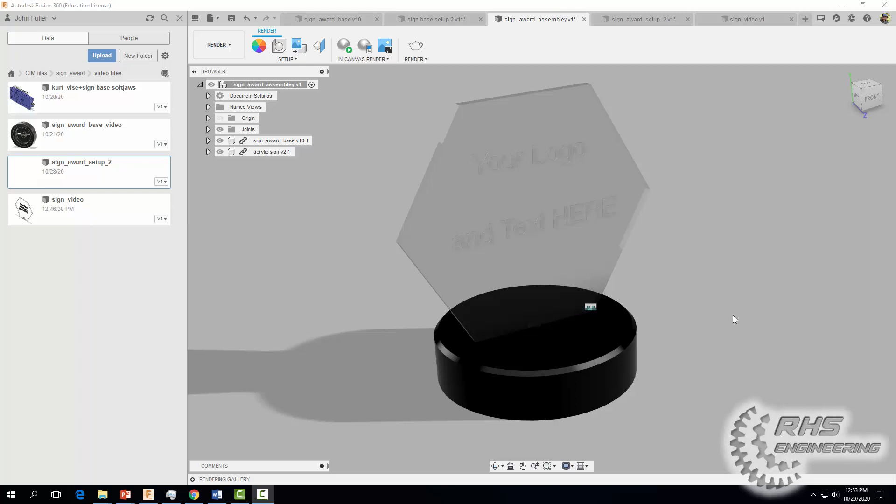Today we're going to learn how to assemble our sign that we made in a previous video to our sign or award base here using a rigid constraint. Then when we're done, we're going to create an exploded view from it. All right, so let's go ahead and get started. Come on up and start a new design.

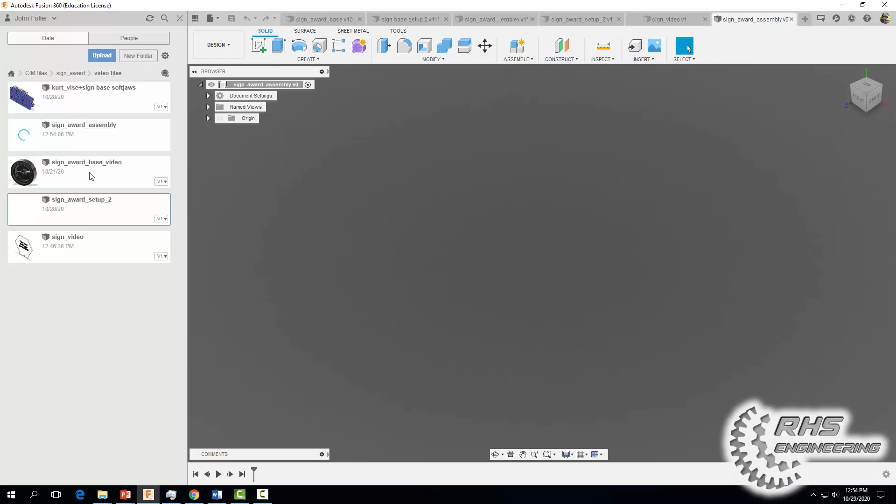Before you do an assembly, it's important that you save it. So we're just going to call it sign award assembly. Okay, and hit save. And now I'm going to go ahead and insert the base here that we made in a previous video, and we're going to insert it into current design.

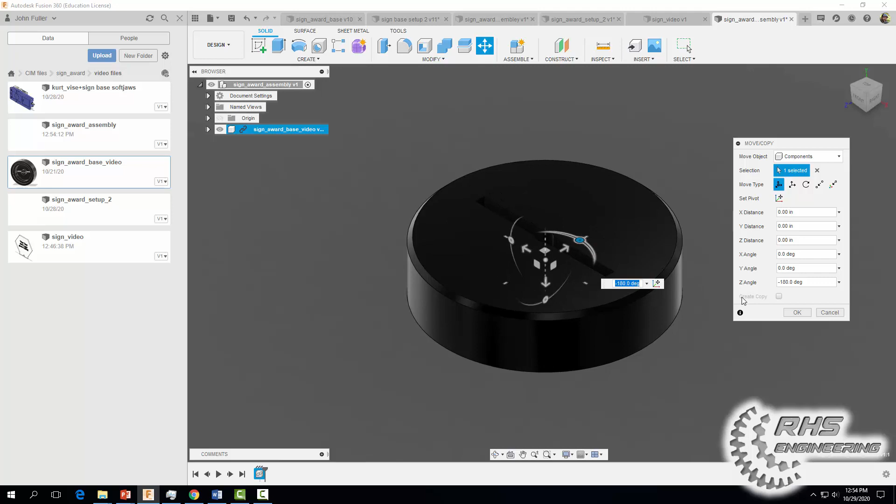We're going to right click and select insert into current design, and I'm going to orientate it or move this guy around to a position that I like. So I'm going to kind of select right there, rotate it around and do something like that. Okay, that looks pretty good. I'm going to select OK. And now I'm going to right click ground, because we don't want it to move. It basically locks it into place.

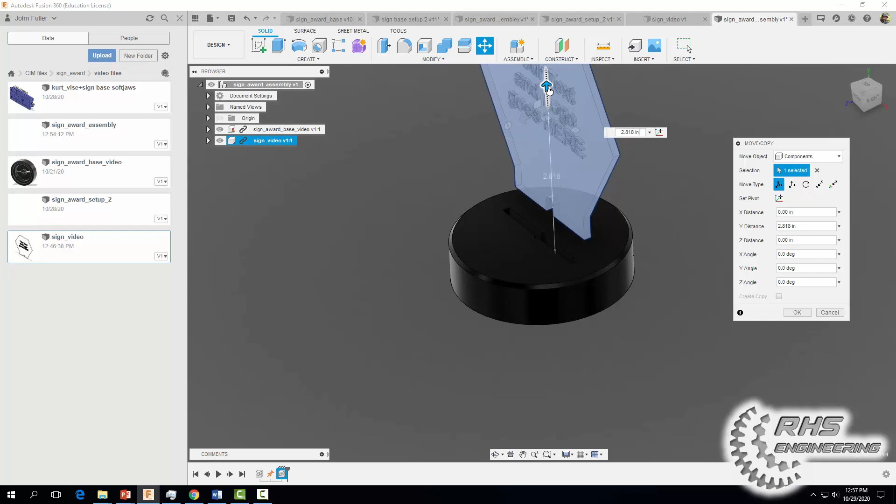All right, now I'm going to bring in my sign. So I'm going to right click, insert into current design, and I'm going to place it in a favorable manner here. I like to place it in a manner where it's going to look like it falls right into place to where we want it. So I'm going to place it right above the slot.

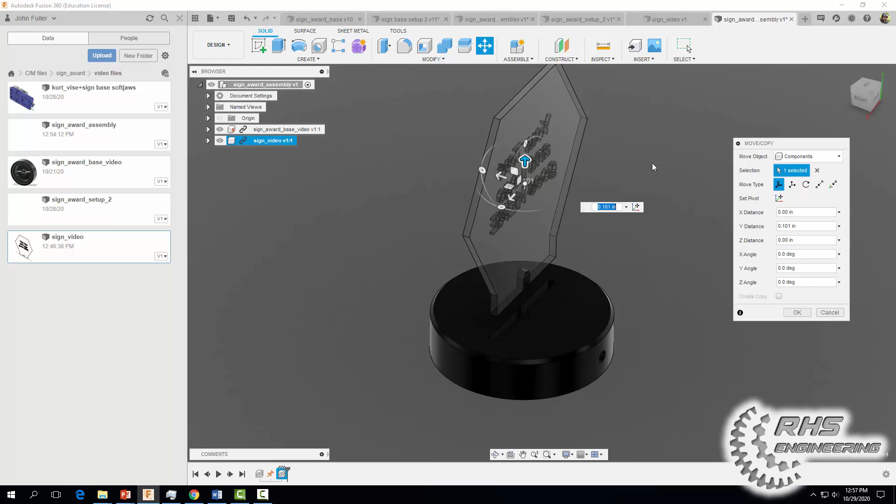One thing you want to make sure if you're in my class and you are making this: make sure that the front of your sign, the part that we're going to engrave on, is not facing this hole in the back here. Remember, we're going to drill that out and put a wire through there. You want the front of your sign to be on the opposite side of this hole. So this position looks pretty good and my sign is facing the opposite direction. So I'm going to select OK.

Now we're going to assemble our sign to our sign base, and we're going to use what's called a rigid constraint. A rigid constraint basically restricts all movement, so there's no movement in the X, Y, or Z direction. It's basically locked into place. So let's do that. Come on up to assemble, select joint, and a rigid joint will not allow any movement. So we're going to select rigid, make sure it says that.

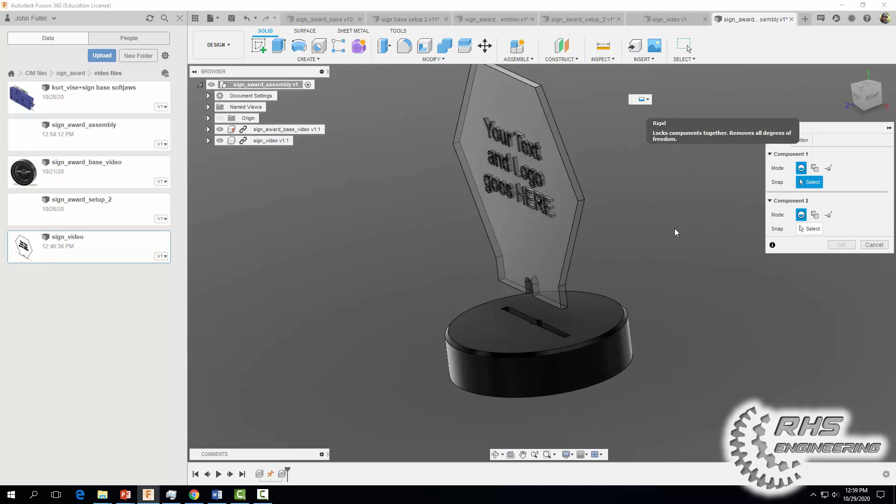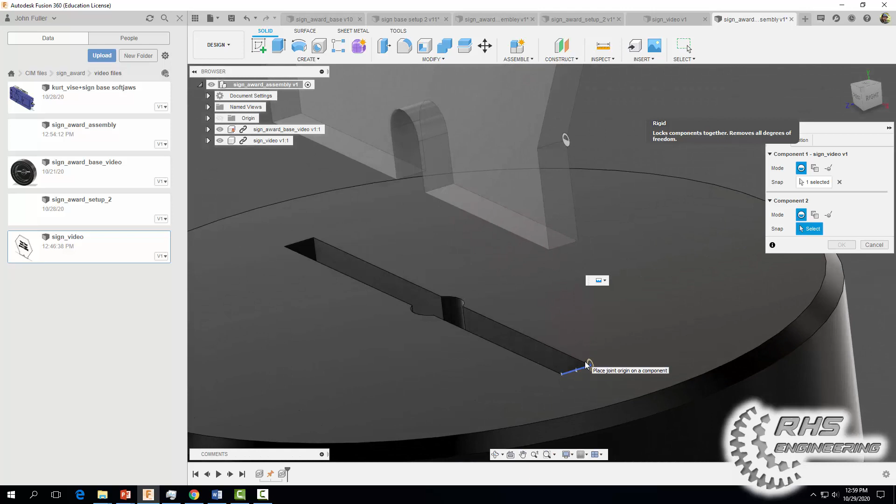And then you've got to think, when you're doing assemblies in Fusion 360, when we put these two parts together, what are the mating parts? In other words, which faces or points are going to match up with other points? So I'm going to click that point right there, and I think it will match up with that point. Let me zoom in and move my mouse right there. And sure enough, there we go. I'm going to hit OK. You can see our rigid constraint has been applied.

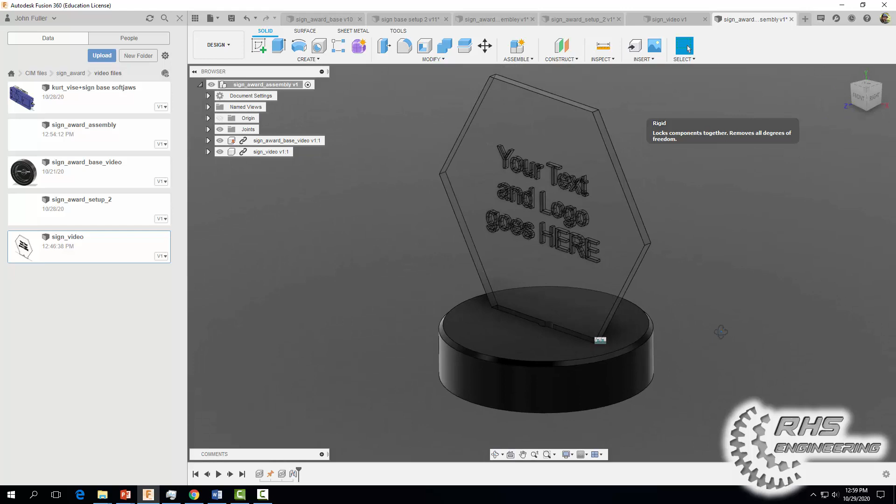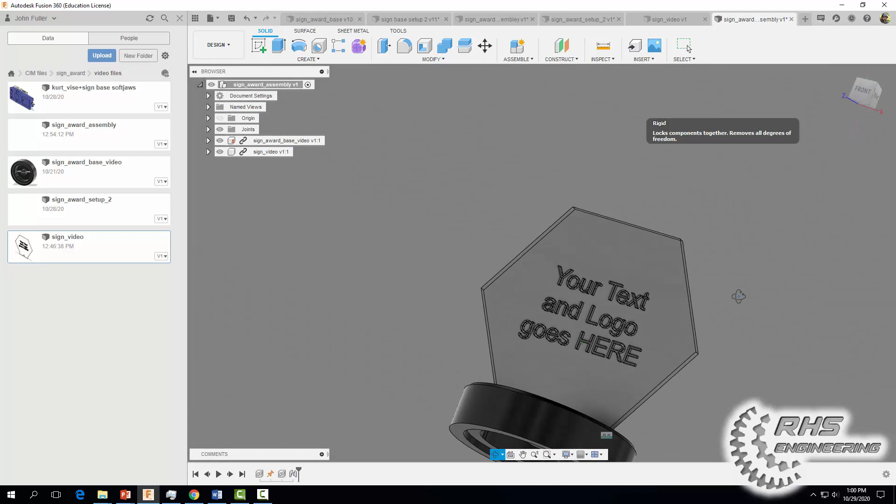When we're done manufacturing this in my class, we will flip this guy over and run our wires in here. We'll put our LED light right here along this boring hole, and our USB cable will come through this hole. So now that we have it assembled, we've got to do one more thing: make an exploded view out of it. So let's go ahead now and save this again.

But before we can create an exploded view, we have to create an animation. So we're going to come on up here to design and we're going to select animation. Okay. And we're just going to pull this guy apart here, so get it in a position I like.

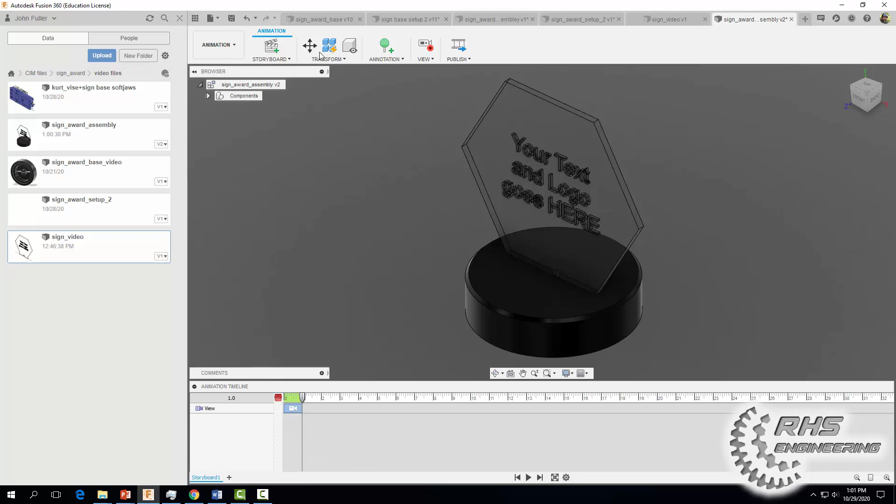And then I'm going to come up here to transform. Okay. I'm going to click on this part and I'm just going to move it up. Something like that. Okay. And that looks pretty good. Hit OK. And I'm going to right click here, show hide trail lines, because I like to see the line that kind of shows it going into place.

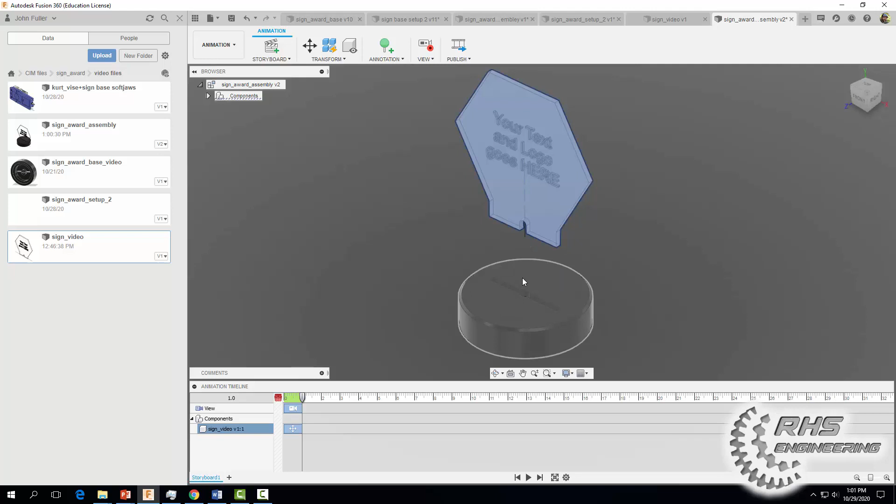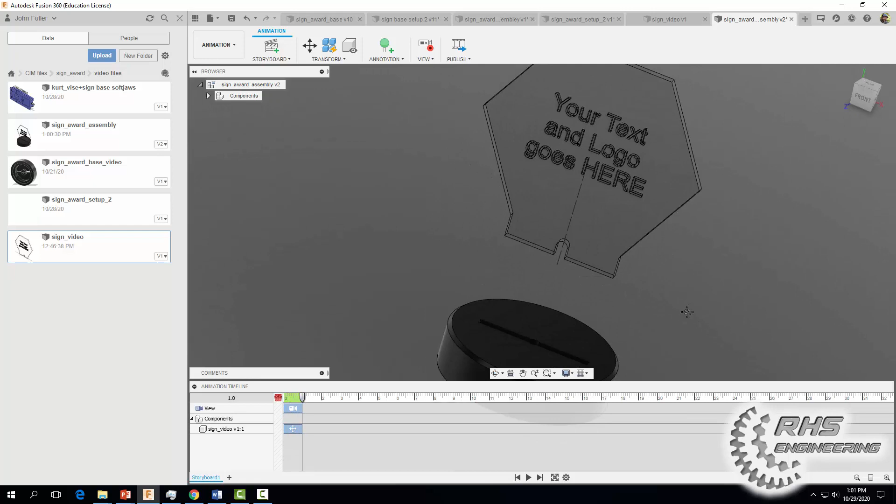All right, and then we can actually animate it. Let's go ahead and hit play. Okay, and I don't like the zoom feature, so I like to delete it, and then I can just sort of see it play here. And there you go. Okay, there is our exploded view. So it basically shows how parts come together or are assembled.

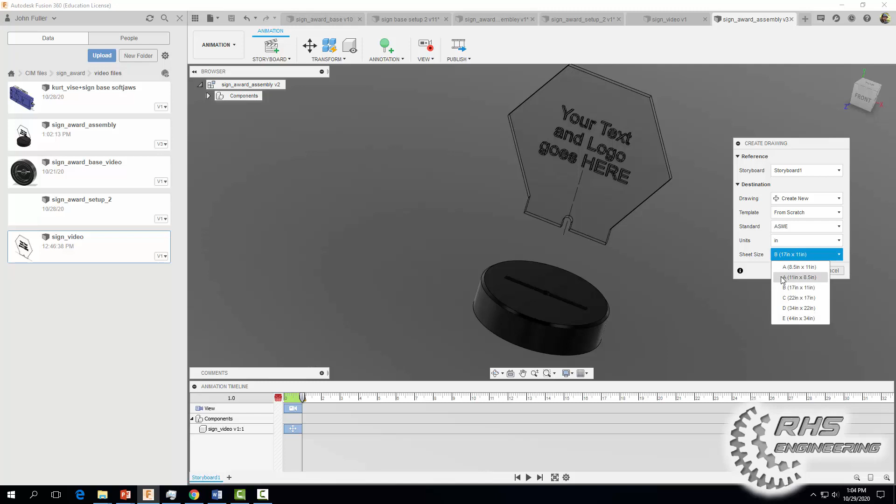Okay, now that that's done, we can create our exploded view. So come on up to animation here, and we're going to do a drawing not from design, but from an animation. And we're going to select sheet size A and landscape proportion. So we want 11 inches by 8.5 inches. Okay, select that guy and hit OK.

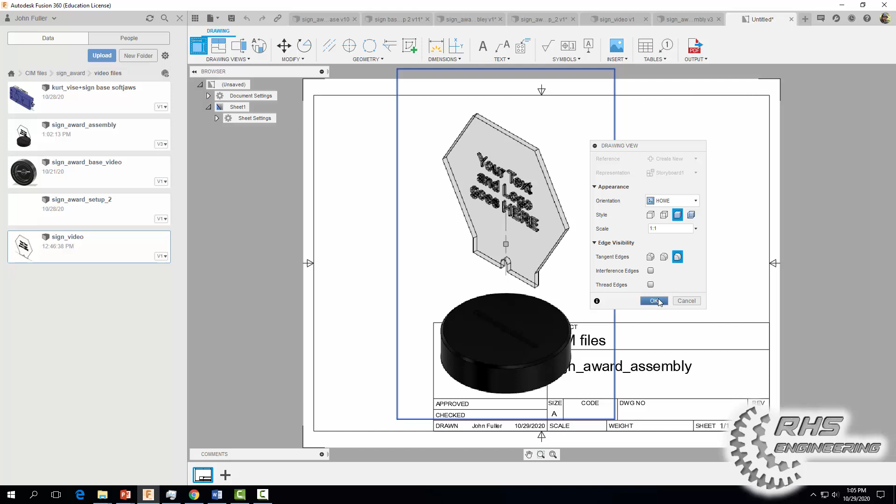And it's going to bring in our part, and it's a little small, so I'm going to make it bigger. Instead of a half, I'm going to make it 1:1. And let's give it some color here. And I'm going to click on the screen, and I'm going to hit OK. Okay, and I'm going to get rid of this title block, hit delete, and I'm going to move this sort of down out of the way.

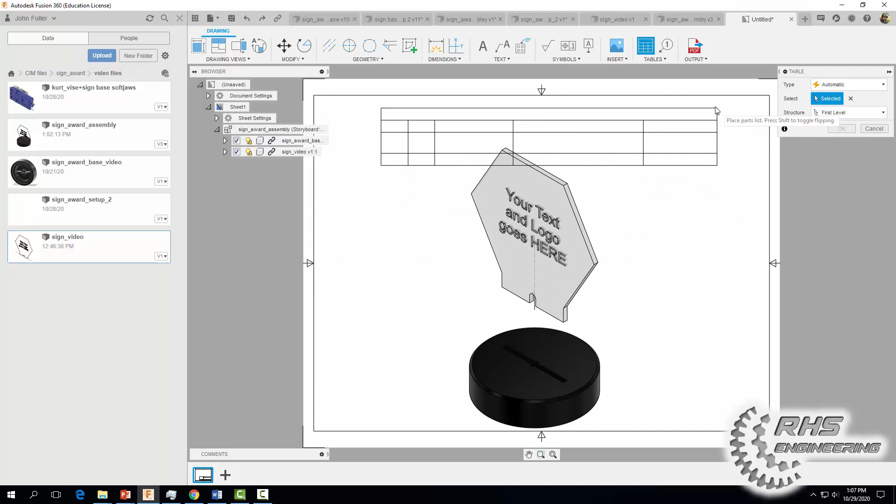And now let's go ahead and add a parts list and some balloons to this guy. So we're going to come on up here and we're going to select our table, and it's going to automatically select our parts here. And if not, you can change it and select the actual ones, but I think we're probably pretty good. So I'm just going to sort of click up here. Okay. And that's pretty good, but I'm going to change a few things here and I want you to do the same. So I'm just going to hit escape and I'm going to click on this guy.

And I don't want description, so I'm going to uncheck that. I do want part name, and I want the mass of it. Okay. And let's see here. I do want material. And let's go ahead and hit close and see if we can shrink down some of these, change some of these table sizes here, because that's really big.

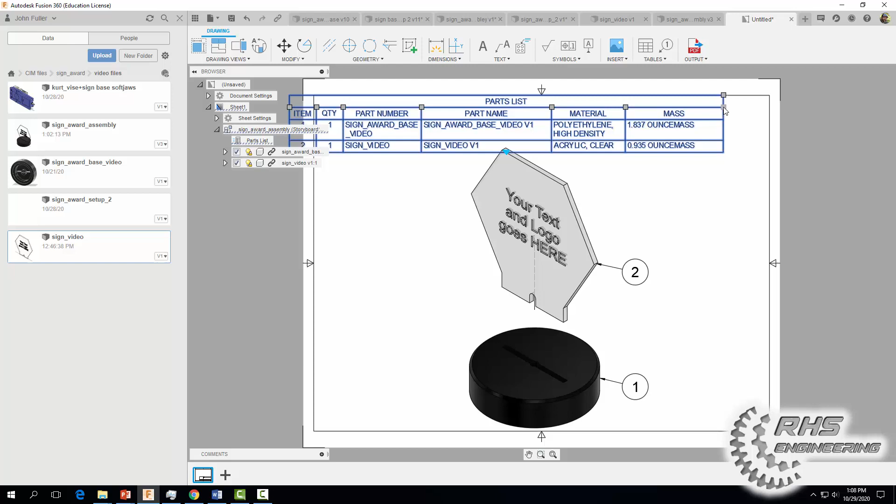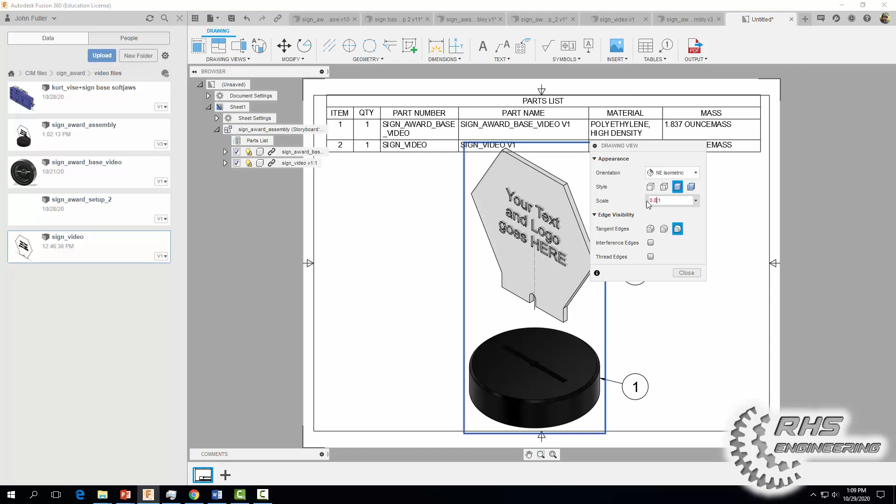Now it looks pretty good, but since our part is kind of crossing over onto our parts list, I'm just going to right click here, edit view, and I'm going to shrink it down. Instead of 1:1, I'm going to try 0.8 to 1. So I'll make it a little bit smaller, hit close.

Okay, we got our balloons, we got our parts list, we're looking good. Our parts list has the weight of the object, the material, high density polyethylene and acrylic, our part names, our part numbers, the quantity, and the item. So number 1 here is our base, and number 2 here is our actual sign, right? That we saved them as. Okay, don't forget to save when you're done.